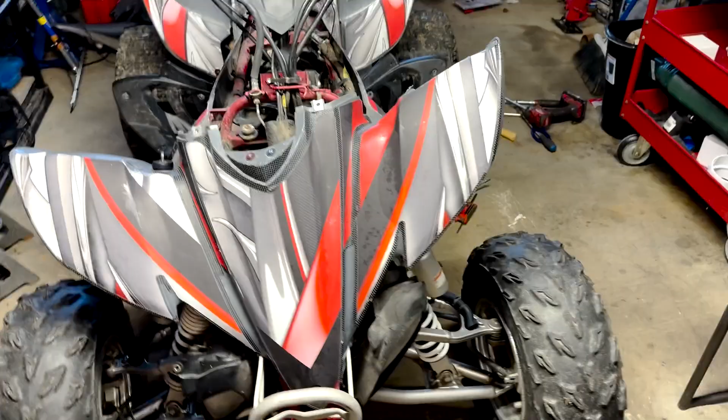Alright, so today I'm working on a four-wheeler I just picked up recently in a trade for a snowmobile that I originally traded a four-wheeler for. I've ended up with this. It's an '07 Yamaha YFZ 450. Check the VIN, 10th digit is a 7, so that confirms it's 2007.

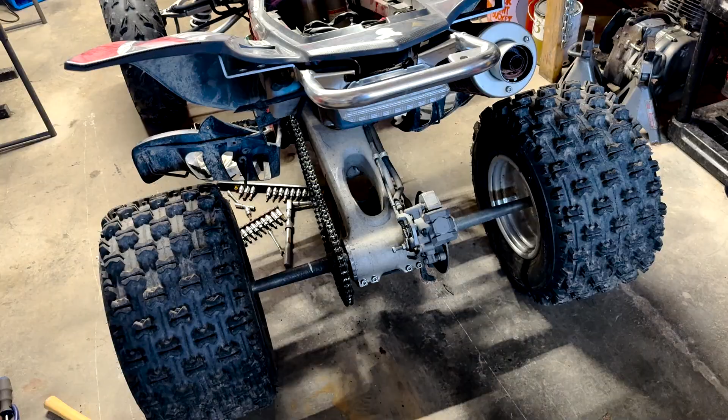And it's actually in pretty good shape. It's all there, suspension's good, everything seems decently tight. Doesn't seem like it's been beat on all that much. Still has like OEM brake pads. I can't imagine those are original, but the muffler's stock, which is good. There's no aftermarket parts, except for a Boyesen water pump the guy installed. I think he said he was having an overheating issue at some point, whatever. I don't know. We'll go through this and figure out what's what.

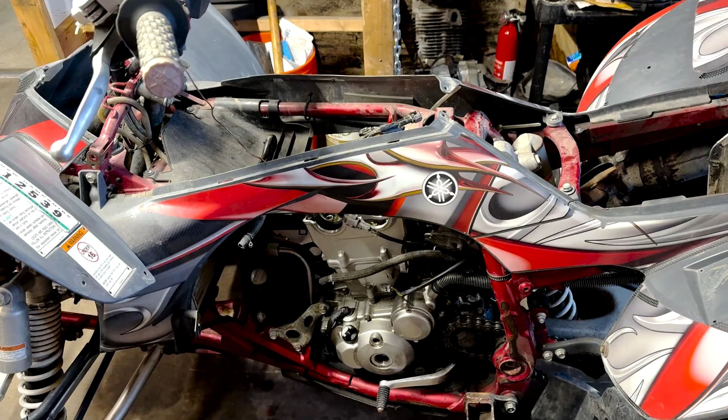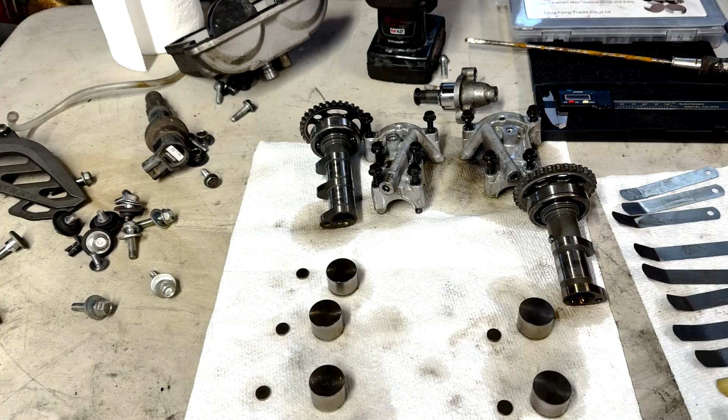But today, basically, I'm working on the valves and getting them shimmed right, because it wasn't running perfect. It was stuttering at idle, wanting to shut off a little bit, but otherwise seems all right. So I've dealt with these in the past. I actually had this same exact quad a little less than a year ago, and I redid the whole engine, split the cases, changed the crankshaft, cylinder, piston. I've already got everything out, camshafts, got the intake and exhaust, and all the shims are out. They're off a little bit.

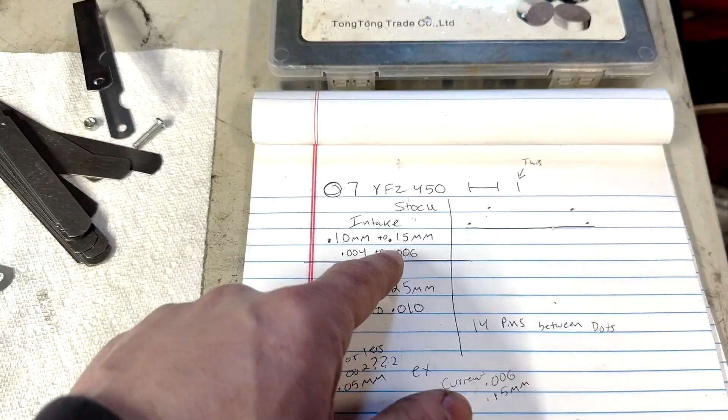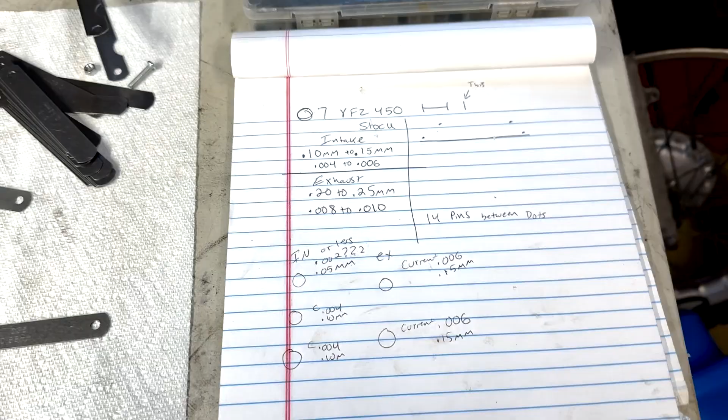Let's see, so this is what it should be. I went online, looked this up. With this quad, you don't actually have to. It's convenient. Right in the air box, tells you everything right there. Clearances are a little off. So let's see, the intake has 3 valves, the exhaust has 2. So the exhaust currently measures at around 0.006. It's supposed to be 0.008 to 0.010. So both of these are the same. They're both off. 0.20 mm to 0.25. Clearance is way too small.

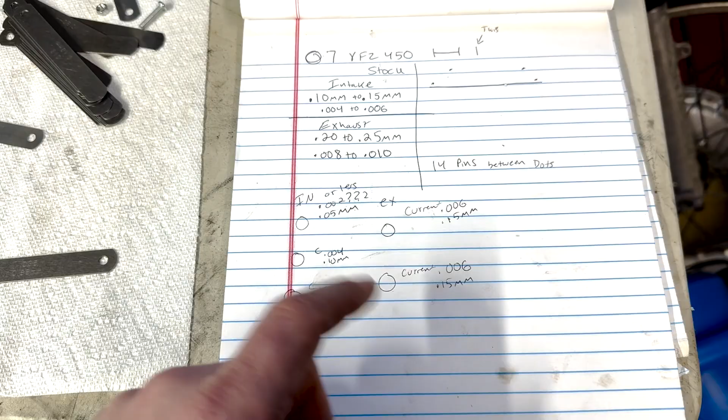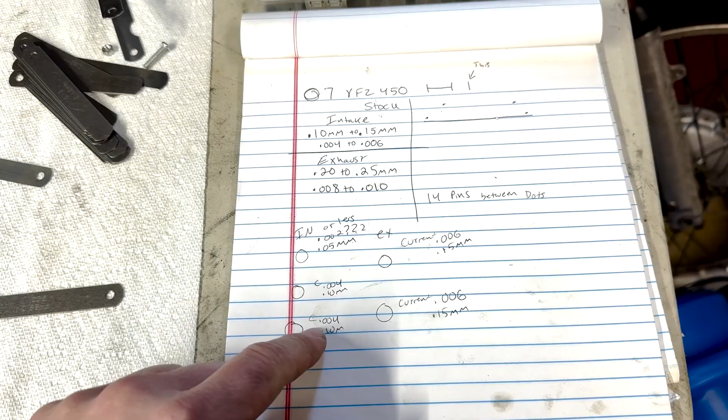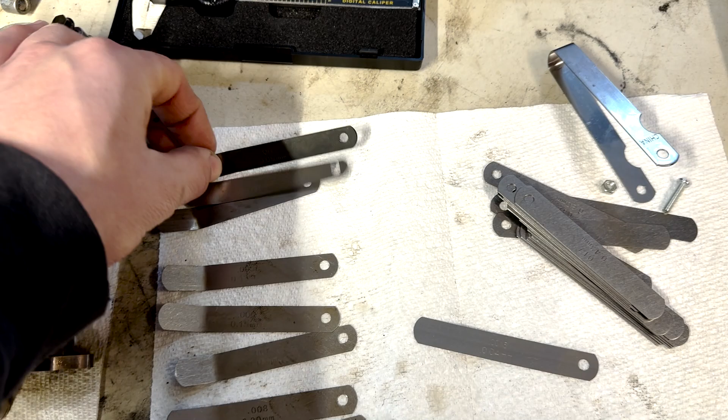But basically these are off, and then these actually are within spec. 0.10 millimeter intake, 0.10 millimeter to 0.15. I like to get it in between. I'd actually like to change these a little bit because they're on the tighter side. I'd like to get these to around 12 or 13 to be right nice in the middle. But if it's in spec, in my experience, that's fine. It'll run fine. It's just gonna get out of spec quicker. This one is a little off. This one, I can't tell how off it is. My feeler gauges only go down to 0.002, and that was not thin enough to get in there. So this one's pretty tight. So we're gonna have to mess around and try different shims and see which ones fit.

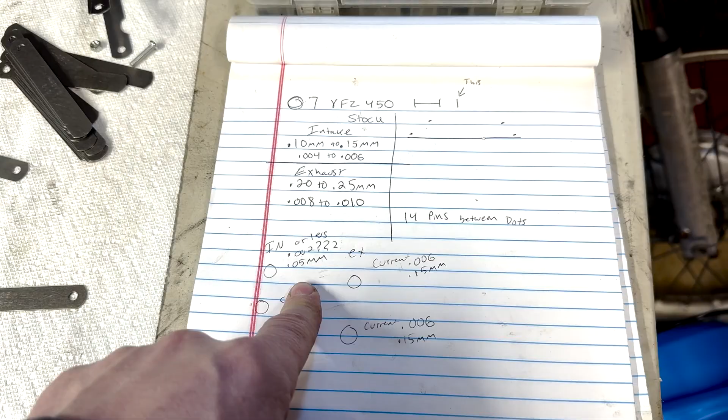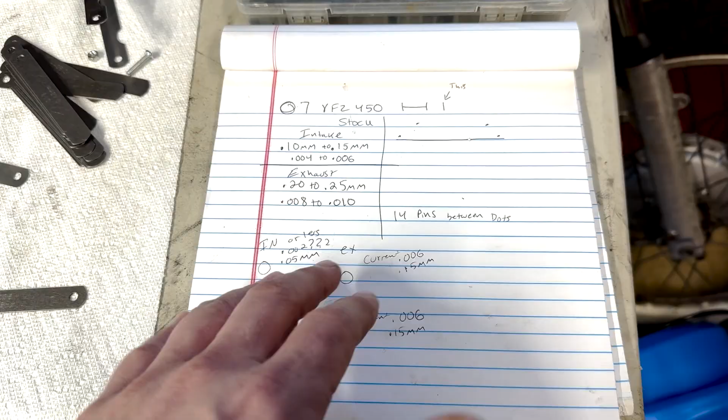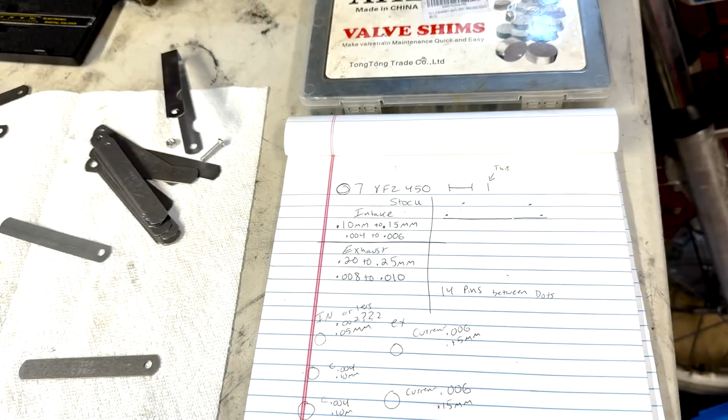There's a calculation online. If you have the actual measurements, you can input it all in, but in my experience, it's better just to do trial and error, because sometimes you use that calculator, you put in the shims that you think will fit, and it doesn't always work out right. So what you got to do is just get the shims you think will work, put them in there, lightly tighten down the cam caps and everything, see what it feels like, and then just go back and forth from there. So right now I have all the shims out. These look like they've been replaced before, unless those are stock from the factory. I can't imagine they are though.

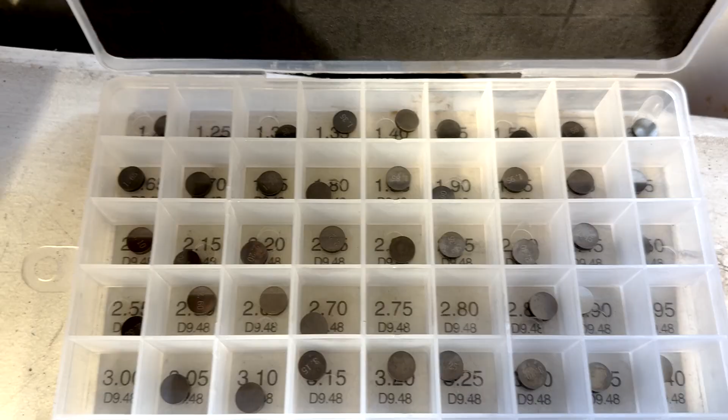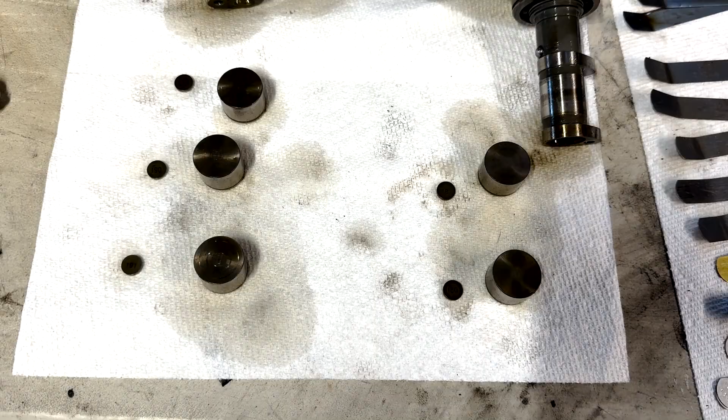So we have a good reference point. We can read pretty much each of these. Like I said, both of these are out of clearance, 181, 180. Then I have a shim kit right here, probably like an Amazon special. And hopefully I have the right shims. I only have one of each size, so hopefully I can make do with what I got. Sometimes you can basically reuse these shims to put over here, move this one over here. So we got to see. And it's always good to take these and measure them with the calipers just to confirm that they're actually around that size.

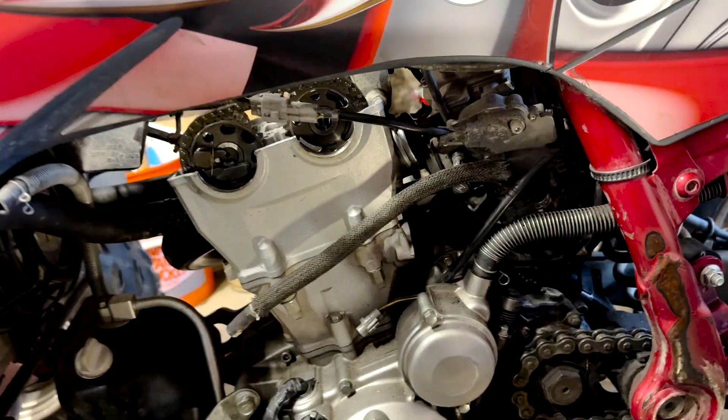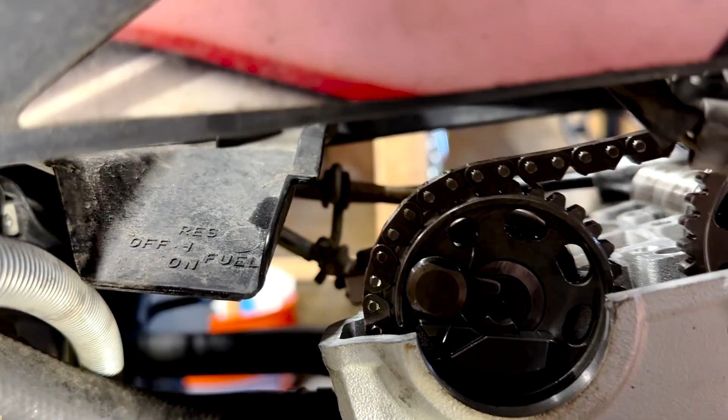All right, I got the first round of shims in here, and I now have this at top dead center. Right in here, you'll see a little single I. If you go to the left, that's not the right one. You want to have it lined up right there, the dot with that one I. And on the cams, there's a dot right here, and then there should be a dot right there. Same thing, a dot up here, and a dot right there. You can see that dot's right there. That one's in a little bit. When this gets to the exact right spot with the chain tensioner being on it, you can see that dot is flush right there.

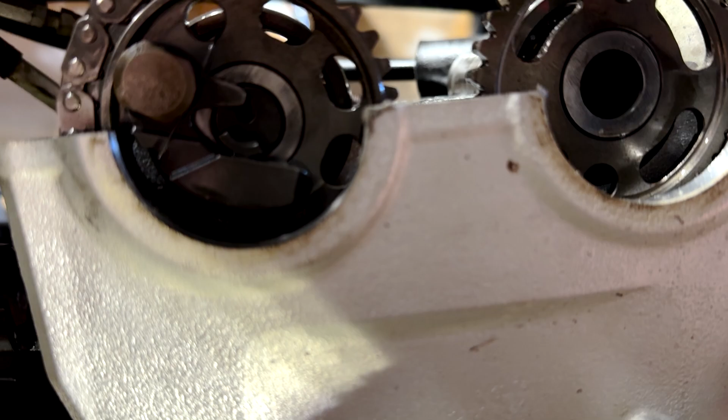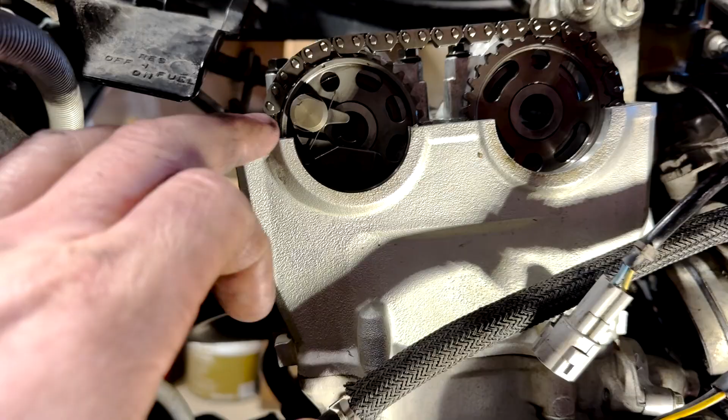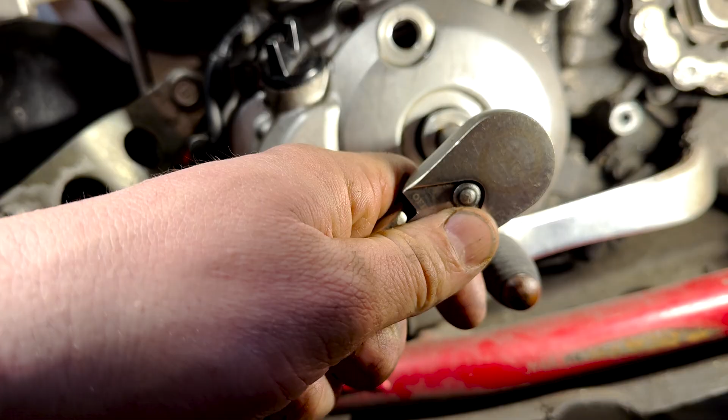And that dot is in a hair, actually. I make sure that's not like a tooth off. All right, it's not fun getting these cams and the teeth and the right sprocket with the chain to get perfectly lined up, but we get the dot exactly right there, dot exactly right there. Down here, we are pretty much spot on. We gotta go back a hair, right to there. Still lined up, still lined up.

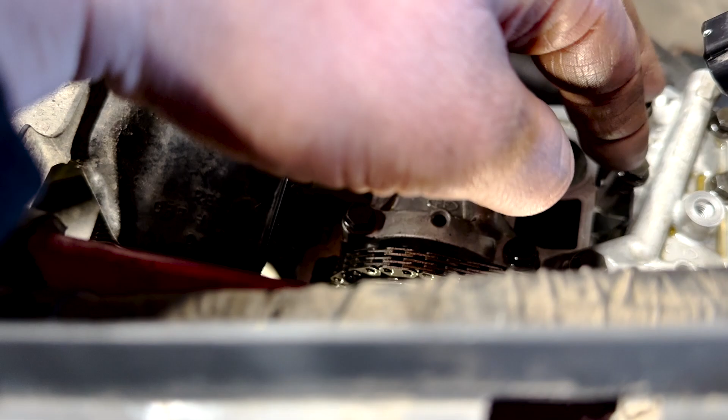All right. Now the fun part is I have to check the shims and see what the clearance is. It's probably not gonna be perfect. I'm probably gonna have to take it all off again. But let's see what they're at. Like I said, this one was way off, so I tried to go a lot smaller to compensate for the possibility of what it was off by, but who knows. These were in spec, but I changed them a little bit to get them right in the middle of the spec. And these are both out of spec, but I should hopefully have them close. So let me check it all.

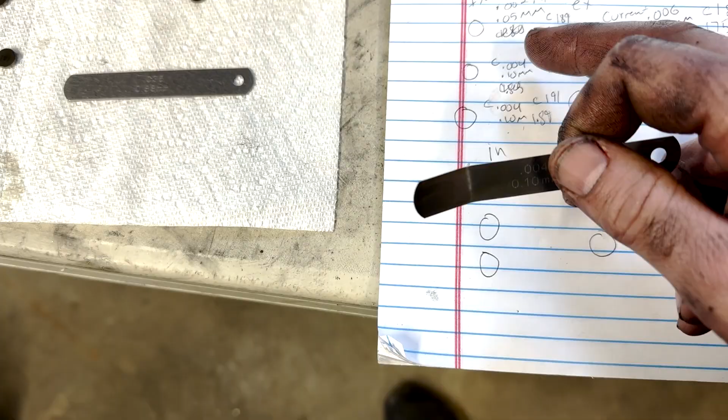All right, so far so good. So this one before was just really tight. The low end, it's supposed to be 0.004. And now, smooth. So it's probably like 0.006. So that's perfectly in spec. This one's loose. I'm going to see exactly what they are.

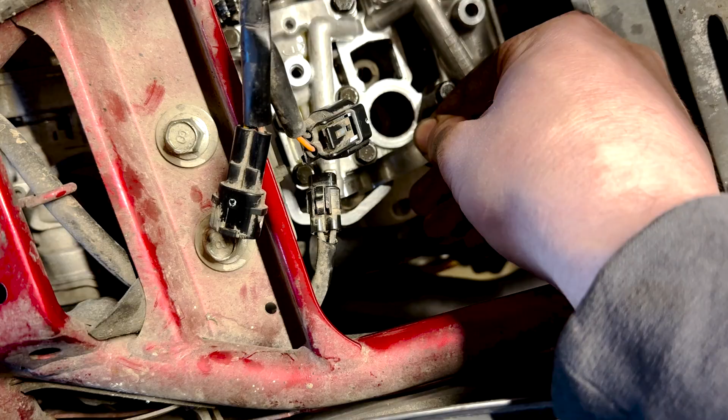This one's a little, it's good still. The problem is it hits the sides. It's such a tight spot. It hits right here and here, so it's really hard to even get a good reading, but that's in there pretty loose. You can see that goes right in there. So let me try the next size up and see. So we're at 0.004. Oh, I got 0.005, 0.006. So it's supposed to be between 10, which is 0.004, and 15, 0.006. Let's make sure 0.006 isn't too loose.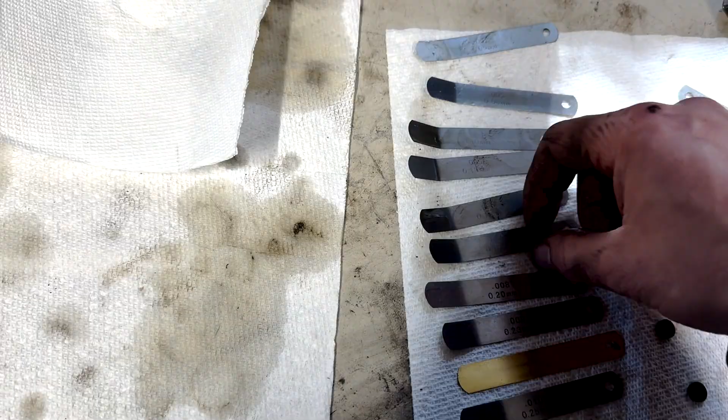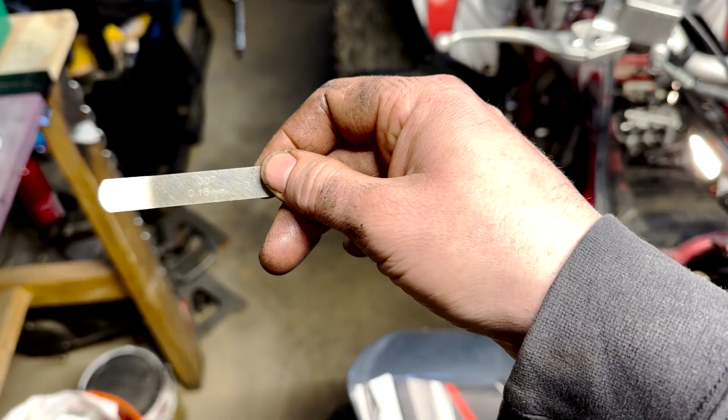Okay, this one doesn't even really go in, so we're in spec there. This one feels just perfect. That one honestly feels a hair loose, but let's go the next size up and see if this fits in. Right, this is intake 0.15, this is 0.18. It's hard to focus on that. If this 0.007 fits in smooth, it's too much of a clearance.

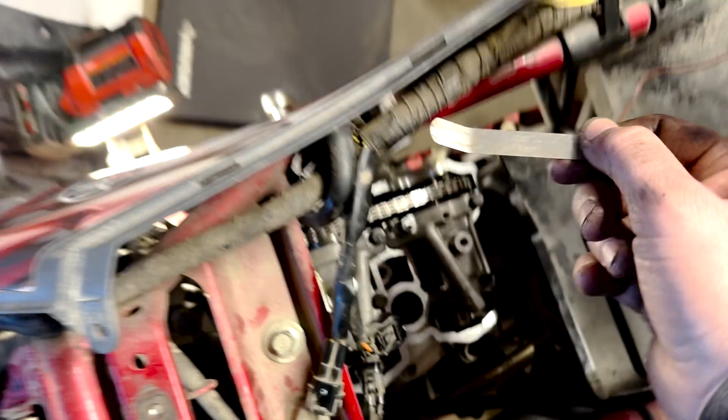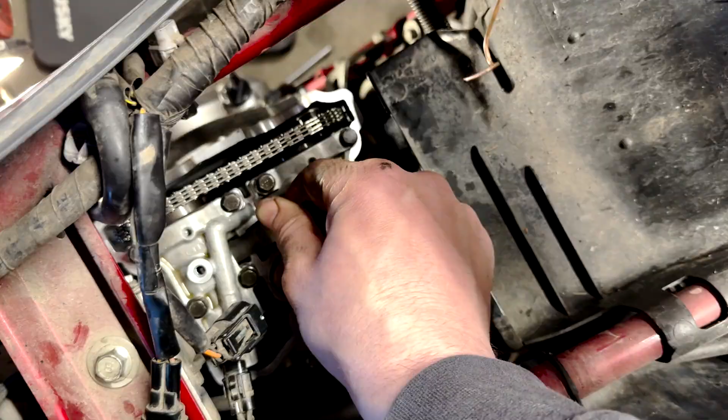So that's tight in there. I think it's good. This one doesn't even want to go in. This one won't go in. This one, it goes in, but it's too much drag. So I could go down a hair in size, but I think it's fine. Let's just try the next size up, because if this one does go in, then we're too loose on that shim and we got to change it. No, that won't go in at all. So I think we're good.

I should go down a hair of a size. But let's see. 0.006 is the top end as to what it should be. You can always put a thicker one in really snug. This one doesn't have a lot of drag on it though. So honestly, it stinks, but I should take this down a hair of a size of a shim. Let's see if I can.

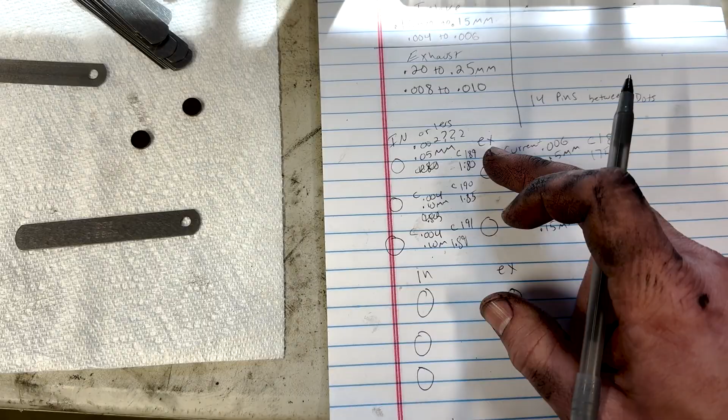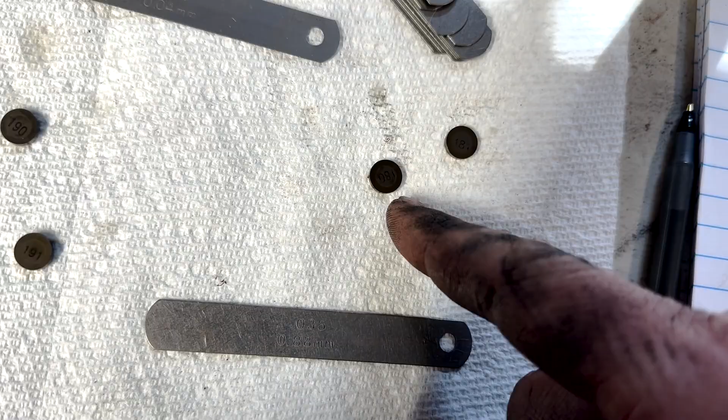So I just put in 1.8. I went from an 8.9 to an 8 because, like I said, it was really tight. I couldn't get anything in there. So an 8, so I got to go down to like a 1.78. I don't have any. That's the problem with this. What do I got here? Like I said, 90, 91, 180. Sometimes people shave these, they grind them down. I don't recommend that. That's not the right way to do it.

All right, so the carburetor, the main is clean and the main is the right one. The pilot is a 48. Spec stock is 45, so it's not a huge difference. But the air fuel screw was off. It was too many turns out, so I set it to 1.5 turns out. That's what the book calls for.

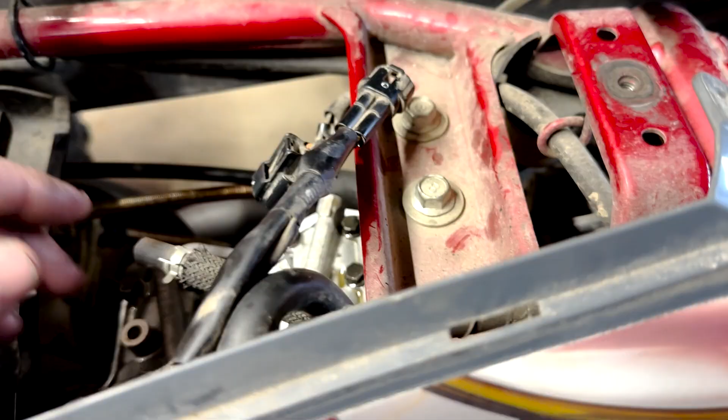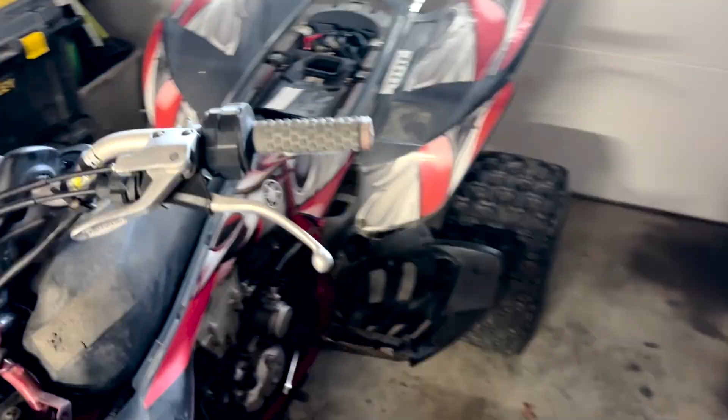So now I just need to torque these down properly to, I think, 10 Newton meters. Get it all back together, carburetor all set up, and then everything timing wise, valves, carburetor should be dialed in. So hopefully it should run better. I'm gonna do all that, put it back together, and then try to fire it up and see how it sounds. All right, I got the whole motor back together, fuel tank on, carburetor. I'm gonna start it up, see how it sounds now. Hopefully it runs a lot better than before, but we'll see.

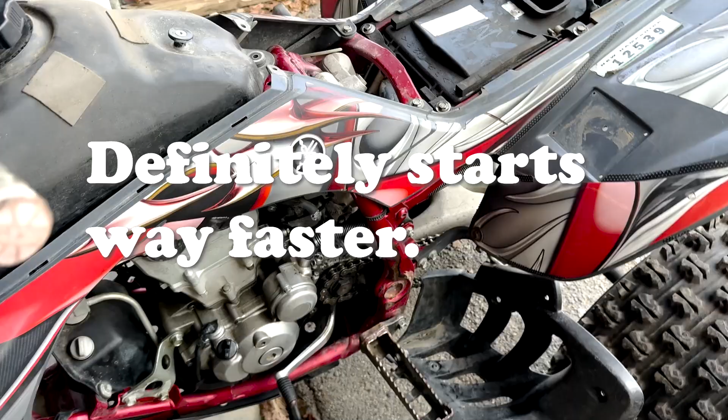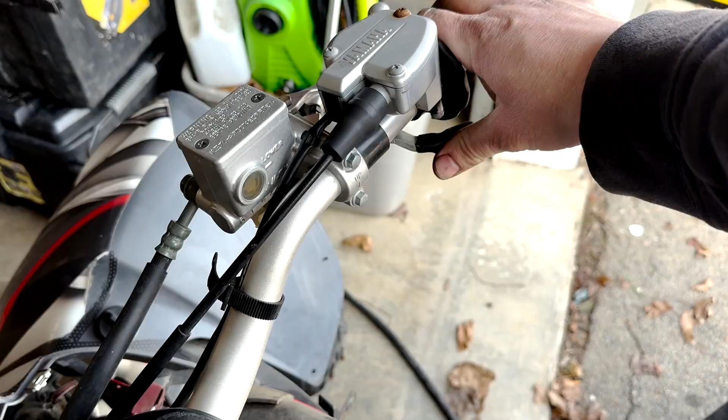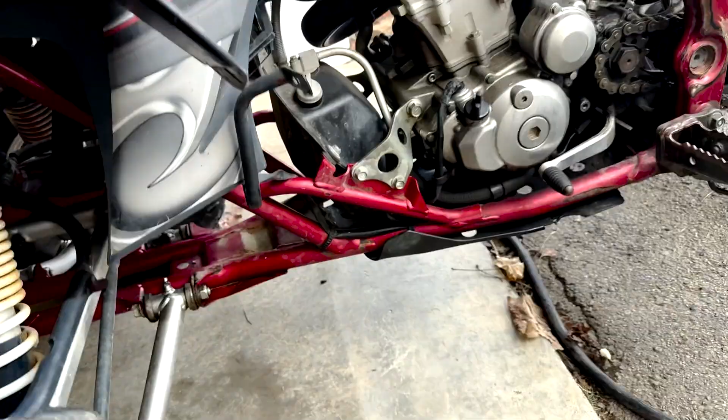All right, pop the choke out. Okay, let's see. Well, it started much easier, I'll tell you that. The idle might need to be adjusted a little higher. Little knob right here. I think we go clockwise. Yeah. Let's see. Yeah, it definitely started up a lot easier. We got some smoke. That's all just the liquid wrench I sprayed on everything. I sprayed the bolts in the header just in case I gotta take them off at some point. Turn the choke off and see what happens. It shuts off with the choke off, so maybe the idle is just set too low.

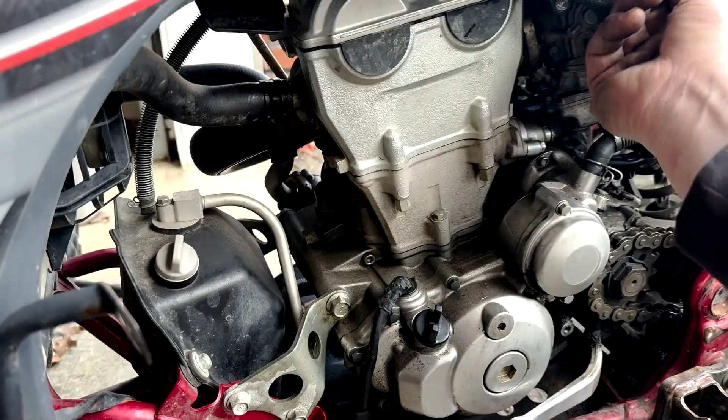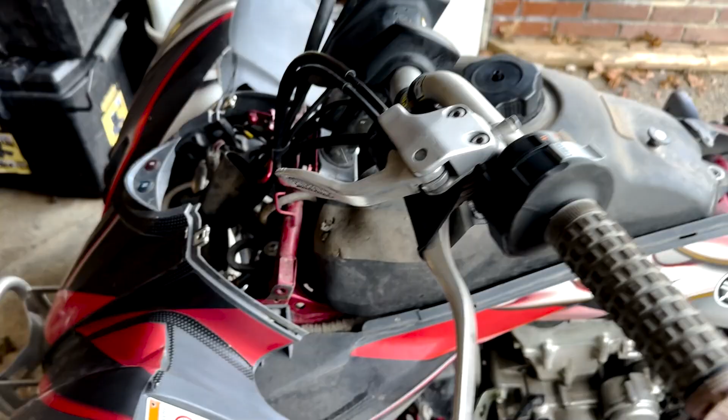The idle hung a little bit. I think that usually means lean. Weird. The jetting, everything should be on point. Definitely idling better, running better. Still got to fiddle with it a little bit though.

All right, so when it got warmed up, I suspect it was running a little lean because there'd be a little idle hang. So it was 1.5 turns out on the fuel screw. I just went about 3, a little bit, so that should make it richer, let more fuel in, so hopefully it won't be lean. If that doesn't fix it, I'm gonna have to rejet it differently. But if this motor hasn't had any work done to it, like a big bore, you shouldn't really have to rejet it.

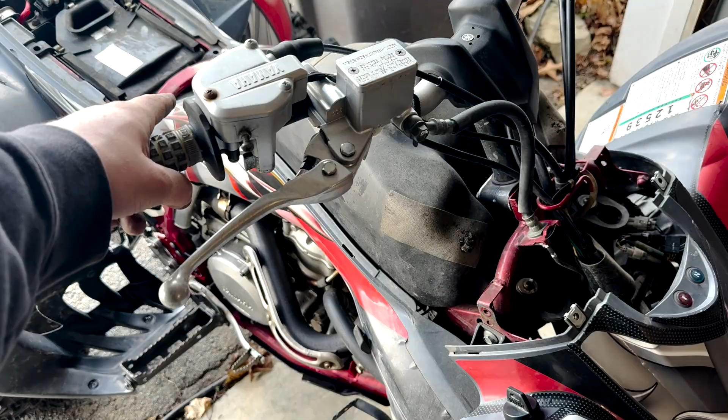It is kind of cold outside. Maybe it's like 40 degrees out, but shouldn't make a huge difference. But I mean, it would run different now than it would at 80 degrees out. So let's try to start it up now and see if the idle hang goes away. So it's idling good, but it still has a little bit of a hang. See?

I don't know. The hanging's kind of weird. It's not really consistent. It almost seems like the carburetor slides on the inside could be a little worn and sticking. That's an issue with these, so I might have to take the whole carburetor apart, just clean everything out and make sure nothing's hanging up. That last little bit seems like it could be hanging, but otherwise it's idling good.

So valves are good, starts up really easy now. Idle's fine, but the idle's hanging a little bit, but it feels more like something is hitting. Could be the rollers in the carburetor, could be the cable, could be the spring. There was a mod before on these things where people would cut the spring or put a softer spring in there so the throttle wasn't so hard.

So I'm just gonna take the carburetor out. I have a rebuild kit for it, for my last one that I had last year. Go through it, replace anything that needs to be replaced, and check to make sure everything's working properly. Apparently, where the slide goes in, there's a coating in there that you're not supposed to use brake parts cleaner on. You're supposed to use gasoline. So we'll do that.

These carburetors are a pain. They're overly complicated. They've got the accelerator pump. They've got like 3 jets in them. There's a lot going on. So I'm gonna take it out, put it on the bench, take it all apart, and probably rejet it a little richer, because the hang idle could mean it's lean. I don't really think it's that lean.

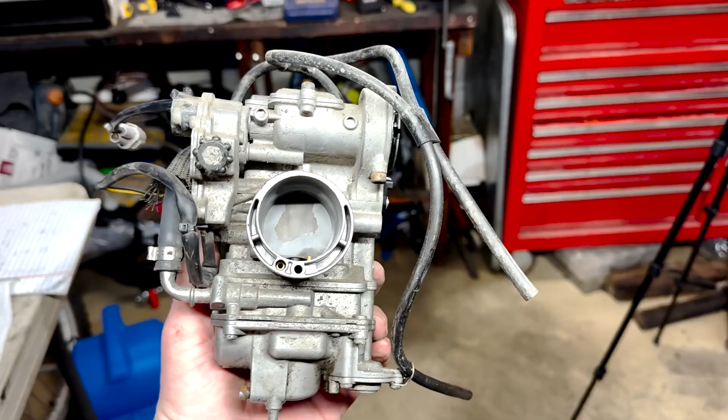It did seem to have a little bit of lag on power, so we will jet it a little richer too. Right now it's got like a 155 main, so we'll try to go like 160, 165 main, whatever we have. I got a ton of jets for this thing. So yeah, let's get this carburetor out. All right, actually I got it out in record time. Got this thing out in like 5 minutes, wasn't that bad.

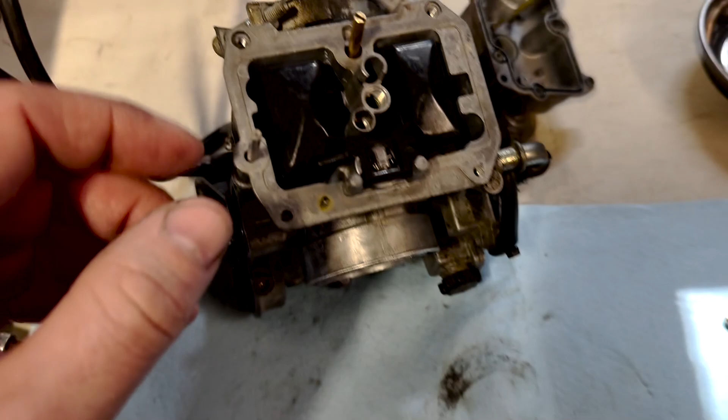All right, so I got the carburetor all apart. Everything honestly seemed pretty clean inside the top. Doesn't seem like anything was holding up the cable. I'll have to put the cable in and check it and see what's going on, but everything seems like it's working the way it should be. So what I need to do is I'm going to go up on the jet. This is, if you can see that,

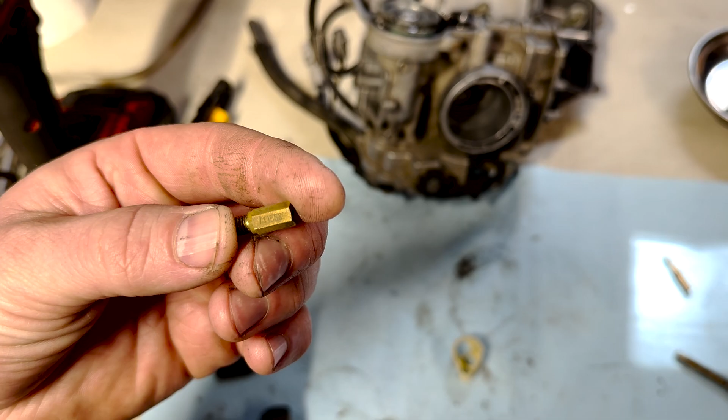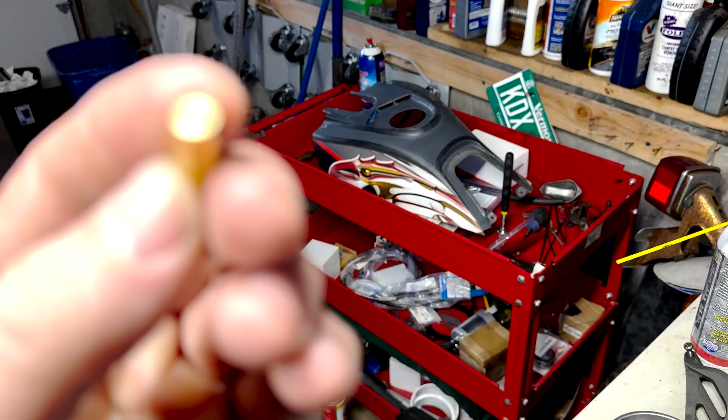this is the 155. All right, so like I said, I have an actual whole carburetor rebuild kit that I had purchased for the last one I had, and this only comes with one main jet. Let's see what this is. This is a 160 main, so that's a little bigger. I want to see if I have like a 165, just to be safe.

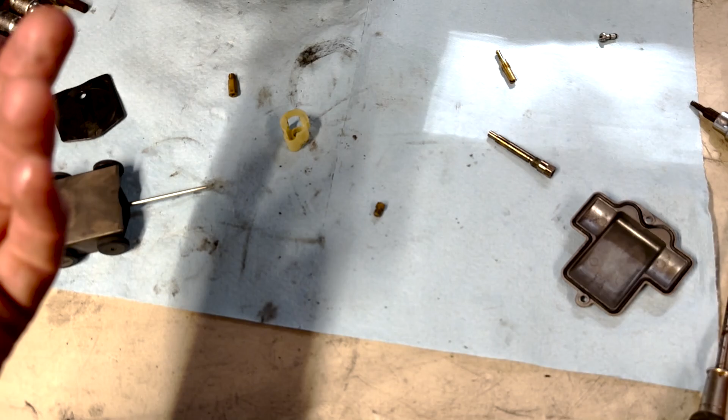Another way you can adjust the mixture ratio on this thing and lean it out or richen it a little bit is with the fuel screw down here. But this is super hard to access when it's in the bike. You literally got to take the airbox out and then undo the carburetor and turn it to be able to adjust it. Maybe if you had some weird special tool, whatever.

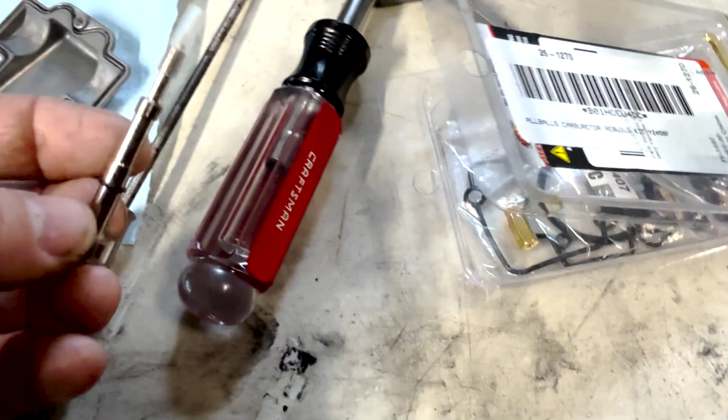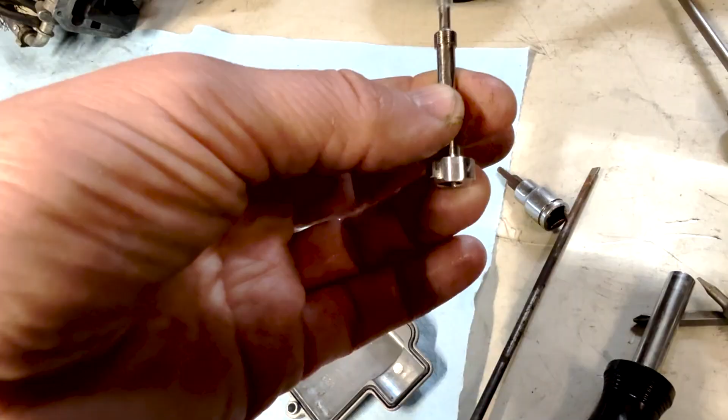What they make is these. These are easier to adjust because they stick out the bottom of the carburetor. The other one stays inside the carburetor. You literally got to put a flathead in there to do it. This one sticks out low so you can adjust it. But I'm taking it a step further to make it even easier to fine tune this thing. And I got one of these bad boys, FlexJet from R&D. These are nice.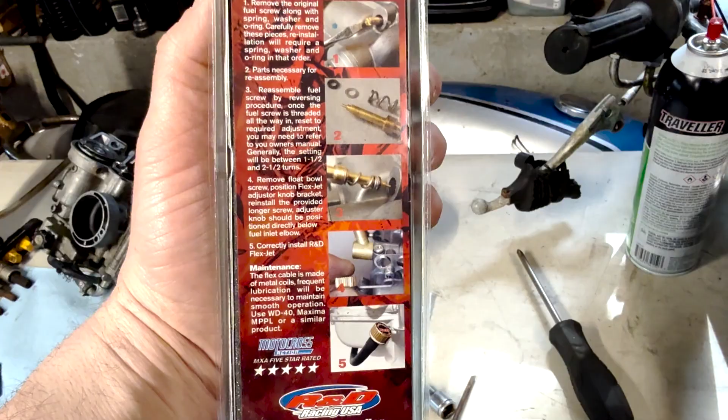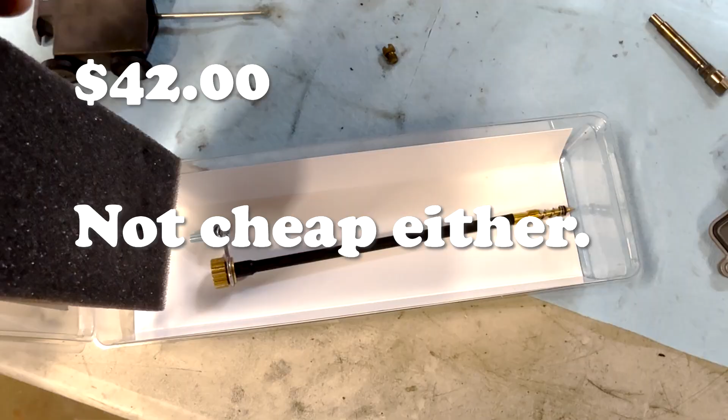These, you just put them in and you can adjust it literally on the fly. Super easy. Comes ready to go. Here, look at this. I forget what this was. I'll put it in the screen if I can find out. It was not that expensive. It was probably 42 bucks or something like that. Comes with everything on it, ready to go. Just install it, and that should make adjusting, fine-tuning a little easier.

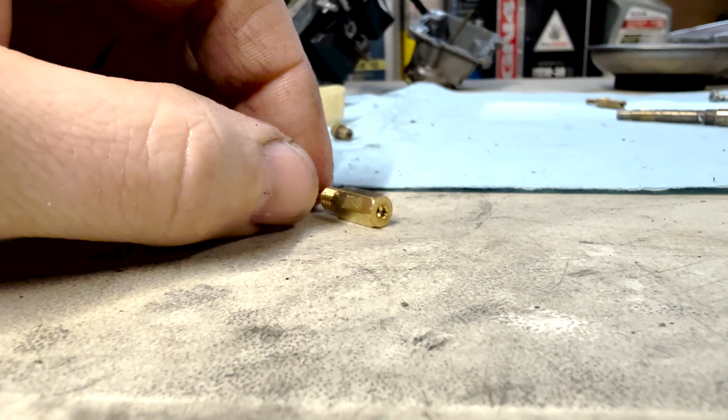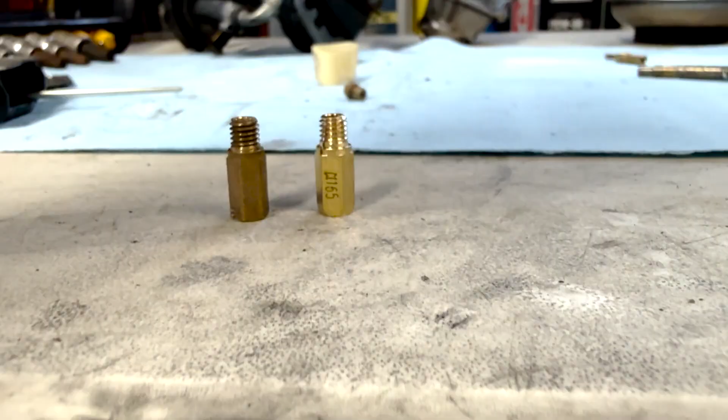So let me see if I got a bigger jet. Yeah, that kit's got a 165. It's funny, it's a cheap knockoff brand, but it has the same little logo for, I think, Keihin or whatever the carburetor brand. Like this one, I don't know if you can see. That is actually Keihin. This one is Yamamoto, the one to the right. So, you know, logo is kind of similar.

I don't know why you would fake it. I mean, it's a jet. I can't imagine. Oof, thread looks a little different. They should be exactly the same, though. Let's see if they match up. Yeah, they match up. So this other one's just newer.

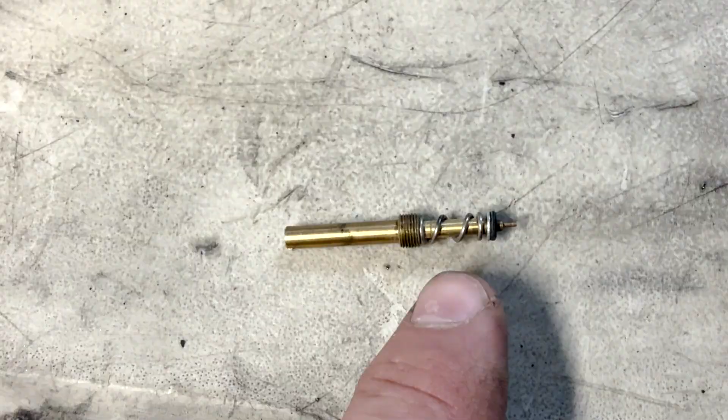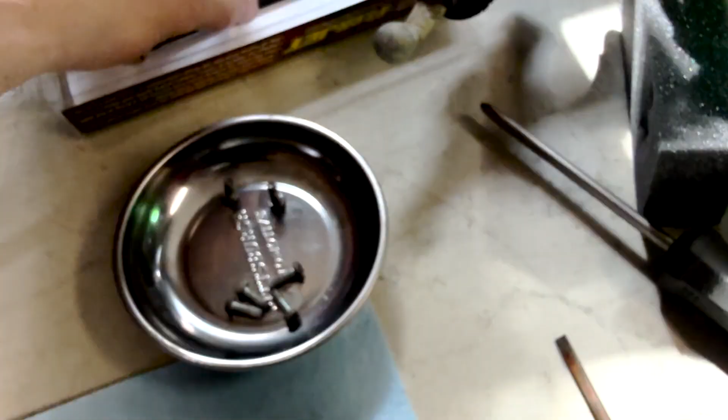Quick little tip for these fuel screws. Sometimes I get confused as to the orientation of where the little washer and O-ring and the spring's supposed to go. It goes spring, flat washer, then the O-ring. This is how it came out. And also the new Dial-A-Jet or Flex-Jet, whatever it's called. Same way. Spring, flat washer, then the O-ring. Sometimes you might mix up.

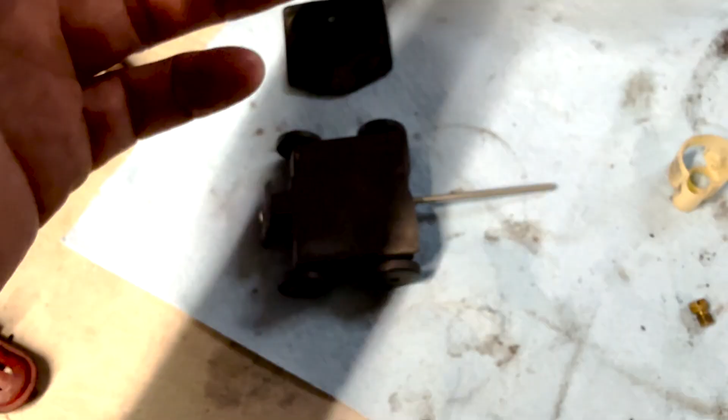And also, when you're taking the other one out of the carb, if you don't got the O-ring in there, it's probably still stuck in there. So carefully, you got to fish it out with a little pick or something like that. I should probably check to see what needle position this should be in. I imagine this is still stock, and I don't really want to mess with that right now. We'll put all this back together, see how it runs, and if it's still not running great, then we'll check that later. But hopefully, making this thing a little richer, easier adjustable fuel screw, and we should be good.

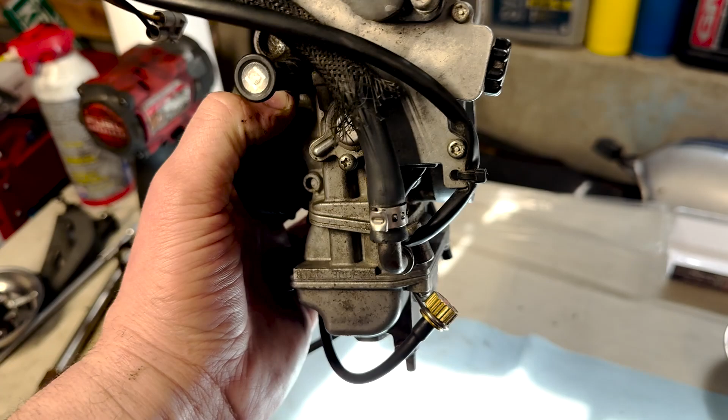All right, I got the carburetor pretty much back together. I got this adjustable fuel mixture screw right there. This thing, like I said, it's got the bigger jet. I checked the accelerator pump, the diaphragm's good, no tears. So I'm gonna put it back in and see if I can tune it just right.

All right, I got the carburetor back in. I'm gonna try to start the engine and see where it's at. I got the bigger jet now, so I need to account for that with the fuel screw adjustment. So let's see if I can get it just right.

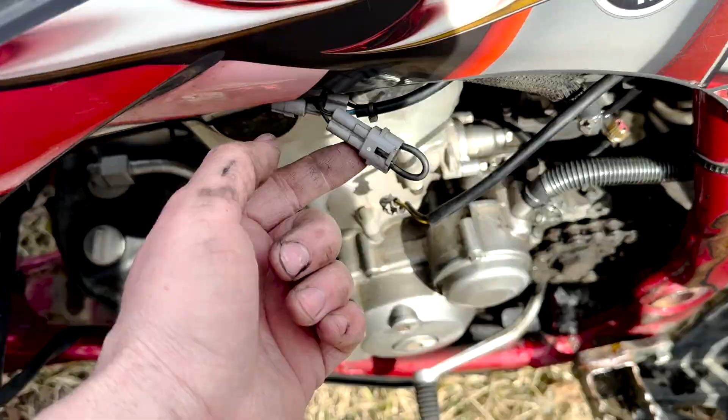Seems a little better now. I think I got it tuned just right. Yeah, I think it was probably just a little lean. No, it seems to be going pretty good now. What I did is, I'm not sure if it did anything, but I jumped the TPS. That's a thing that people do with these things. Apparently those, or the TORS, the throttle override system. The Banshees have that too. But I don't know, it seems like it's running pretty good now.

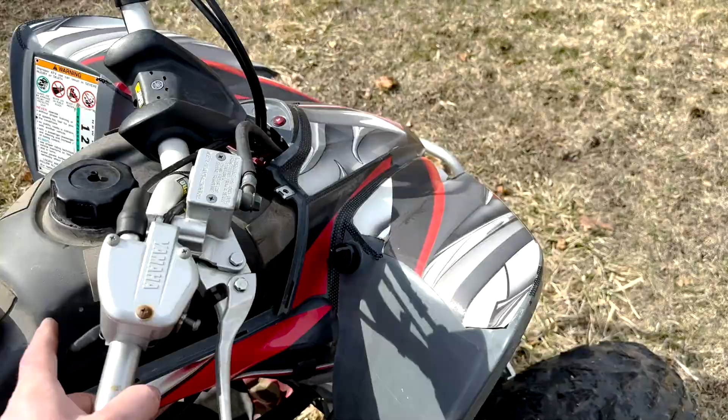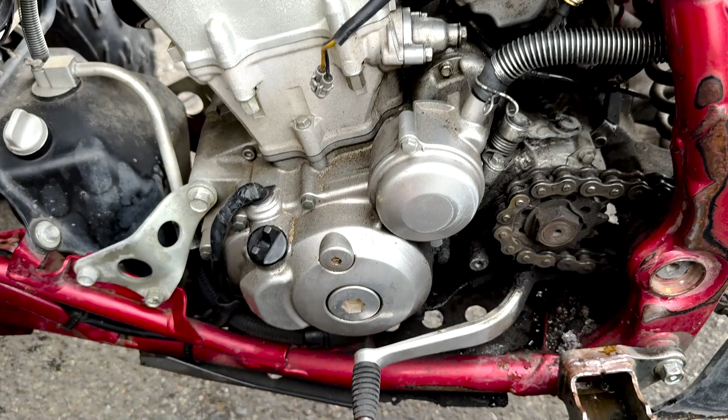When it rides, it goes pretty good. These things don't love going slow. They're made to be high revving. They don't lug like a 400. So yeah, it's running pretty good now. Like I said, I jumped the throttle override system. Most people do that. I'm not sure if it made a difference. I could take it off and try it, but it seemed to be running pretty good for a stock YFZ 450.

So yeah, it's running a lot better. I'd say that's pretty much the best I'm gonna get it. It's jetted pretty good. Now I just got to piece back together the plastics, put everything back on. I ordered new grips, and there's a Zerk fitting that didn't come on this thing. I got to add one of those, top it off with grease. Maybe get a block off plate. Basically though, I'm going to sell this. This is just so I can turn around, make some money on it.

Add some bolts on the plastics, but other than that, everything's pretty much here. It's good. The shocks work pretty good. It's in pretty good shape. So hopefully this video gives you a couple tips on working on these things. These FCR carbs can be a real pain. They're overly complicated, unlike the old carbs with just 2 jets, pilot and main. These things have 3 jets and an accelerator pump and this and that, but hopefully if the weather gets good in the next few weeks, I'll actually be able to take it for a ride. I think we still got some snow in our trails, but pretty soon it'll be ready to rip.